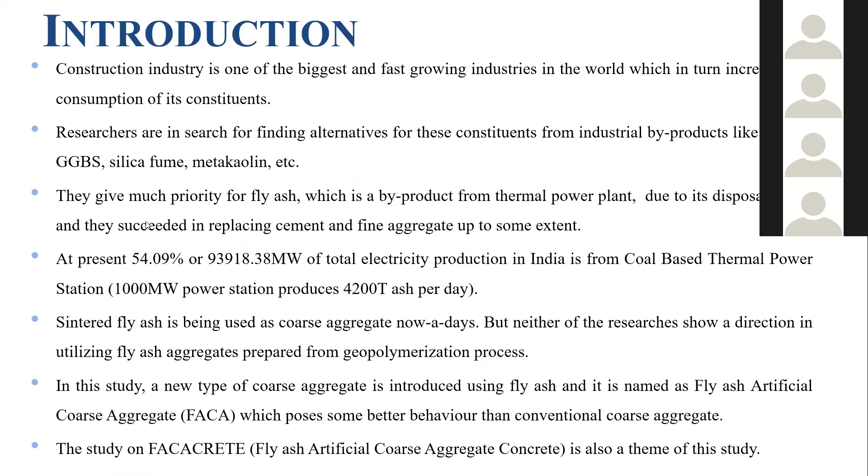The construction industry is one of the biggest and fastest growing industries in the world. In turn, it increases the consumption of its constituents. These are some general aspects in concrete. I'll come directly to the presentation.

Most of the power is generated by coal-based thermal power plants. You burn the coal, and the end product from the thermal power plant is fly ash. The government is currently running a mission, the fly ash mission, an ash utilization mission. So how do we utilize this fly ash effectively? Ten or twenty years back, there was a huge demand and availability of fly ash, and now researchers are studying how to utilize fly ash in concrete and other byproducts.

Still we have some problems. Last week I had a request from the Ministry regarding the Coal Mission and Fly Ash, to contribute to fly ash utilization in an effective manner. They called for that project, the fly ash mission, and we are contributing to it. We need to find how to utilize this fly ash effectively, along with byproducts from this industry like silica fume, GGBS, and other waste materials available around us.

This project will particularly focus on fly ash. The total fly ash production in the world is enough to fill train cars stretching from the north to the south pole. That much amount of fly ash is available at present. That is one prediction.

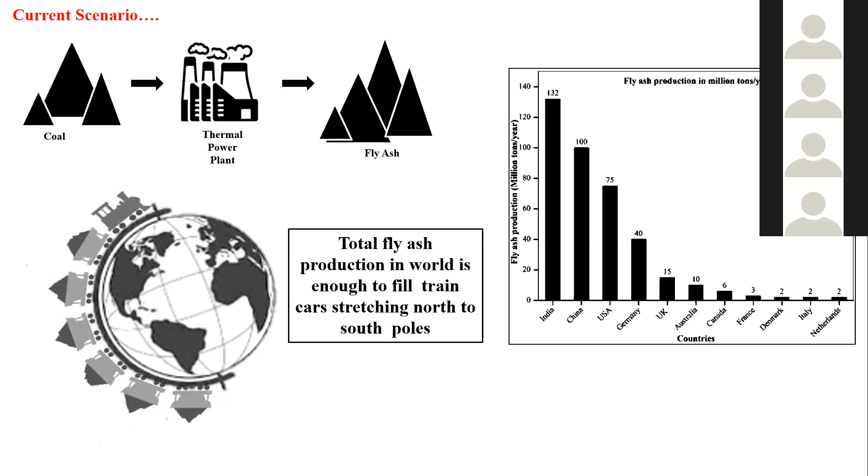These are some of the problems at present. So what we want to do is take the waste materials around us, like silica fume, GGBS, and others, and figure out how to make them useful materials for the construction industry.

I don't want to explain too much about geopolymers, as most people are well aware of that already. Geopolymer is nothing but a source material mixed with an alkaline solution, which together produces a solid matter through a geopolymerization process. This is the technology, and we use it to make artificial aggregate. That's a modified technology, and it is patentable.

Now let me give a brief introduction to geopolymers. What is this technology? Geopolymers are synthetic mineral products that combine properties of polymers, ceramics, and cements, synthesized by polycondensation reactions of geopolymeric precursors. Source materials include kaolinite, clay, fly ash, silica fume, rice husk, red mud, GGBS, and others. The basic property needed for a source material is that it should be rich in alumina and silica.

Alumina and silica - these materials are suitable as source material to make geopolymers. Most materials with silica, like sand, are suitable. It comes down to alumina and silica.

Yeah, these are some introductory parts about that.

Now, how much waste is generated by black fly ash and all those things? For example, this is the typical problem. Two die after dyke of Reliance power plant's fly ash pond breaches in Madhya Pradesh. Most of the fly ash and everything is discharged into the water stream, or stored in that particular open area.

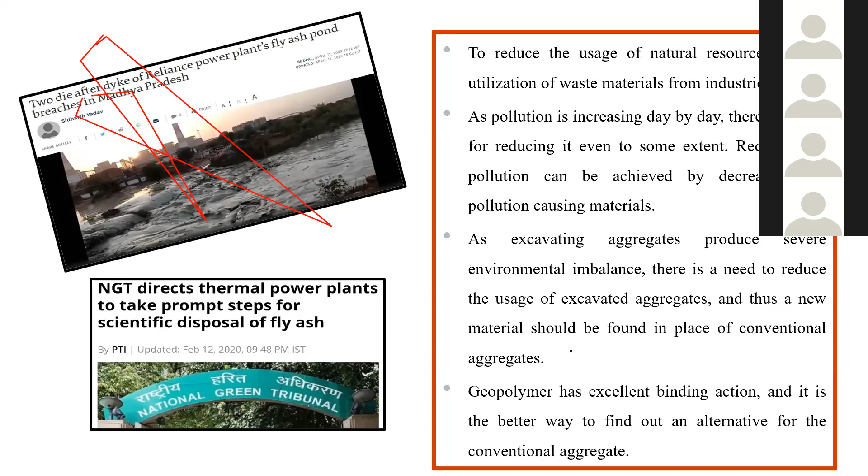Due to water as well as air, it gets transferred from one place to another. There are a lot of issues on one side. The fly ash was obtained from the Mettur Thermal Power Plant near Salem district of Tamil Nadu. It was obtained at the rate of rupees 800 per ton.

The alkaline solution used is NaOH and Na2SiO3. Sodium hydroxide was obtained in pellet form. Different forms are available. Pellet form from the local market at the rate of 40 rupees per kg. The NaOH pellets are converted into NaOH solution of required molarity one day before preparing the alkaline solution. The sodium silicate solution, Na2SiO3, was obtained from the local market at rupees 8 per kg.

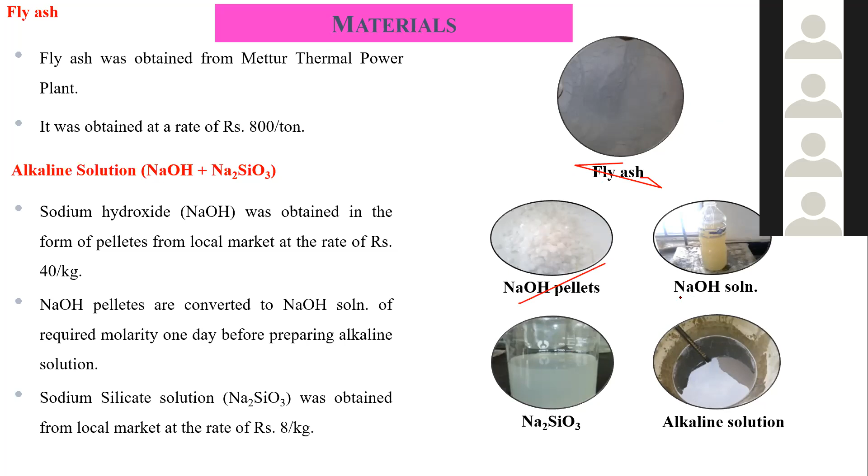These are some byproducts: fly ash, NaOH pellets, and NaOH solution. This is a solution format.

Now, for the FACA, class F fly ash with a specific gravity of 2.26 is taken, then NaOH and Na2SiO3 are taken. Then for the concrete, ordinary Portland cement 53 grade, locally available manufactured sand, crushed blue granite stones, locally available high yield strength reinforcement bar, and potable water are used for this concrete purpose.

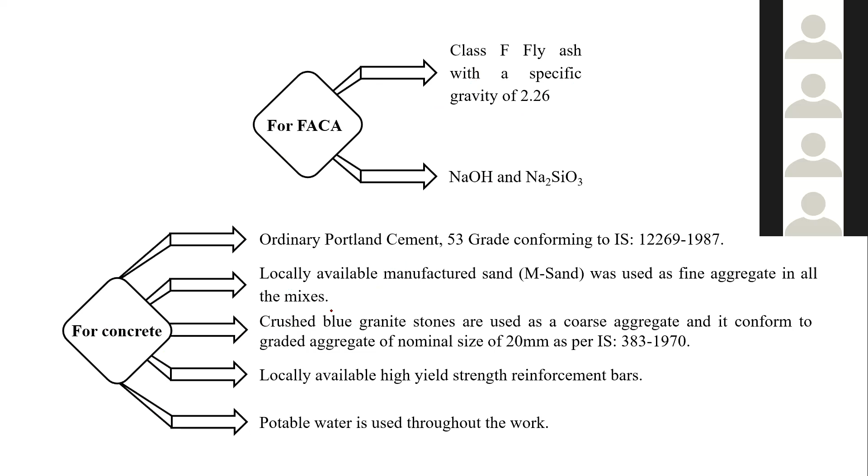Now, what is FACA? That is fly ash artificial coarse aggregate. This is a patent registered material. Myself and Sir Ajmal registered the patent.

What is the year? Application number... 2018. Yeah, 2018. That is fly ash artificial coarse aggregate, called FACA.

So you have this document open, you can get the technology behind that, right?

Then preparation is very easy. You take the sodium hydroxide solution to sodium silicate solution by mass ratio fixed at 0.5 for all the mixes. We tried different molarities from 8 to 16 molarities - 8, 10, 12, 14, 16 molarities of sodium hydroxide, NaOH solution was used.

The ratio of activator, that is solution, to fly ash by mass is varied from 0.3, 0.35, 0.4. It varies with respect to researchers, according to your convenience, according to your laboratory, according to your purpose. You can change the molarity, the ratios, everything.

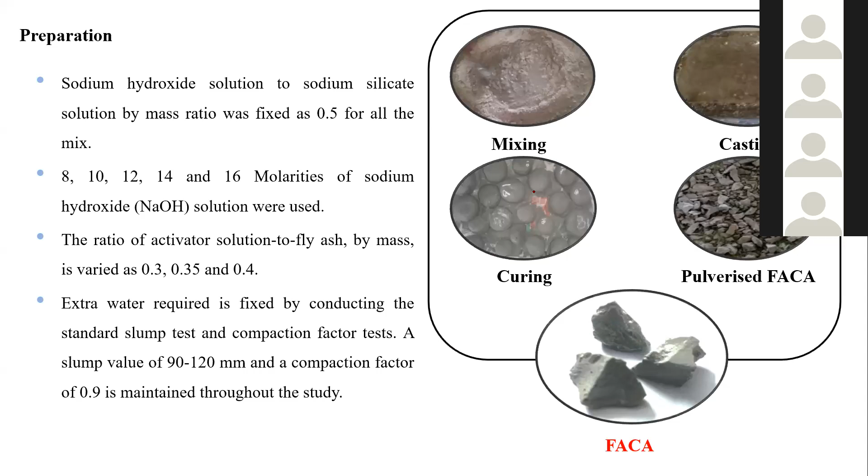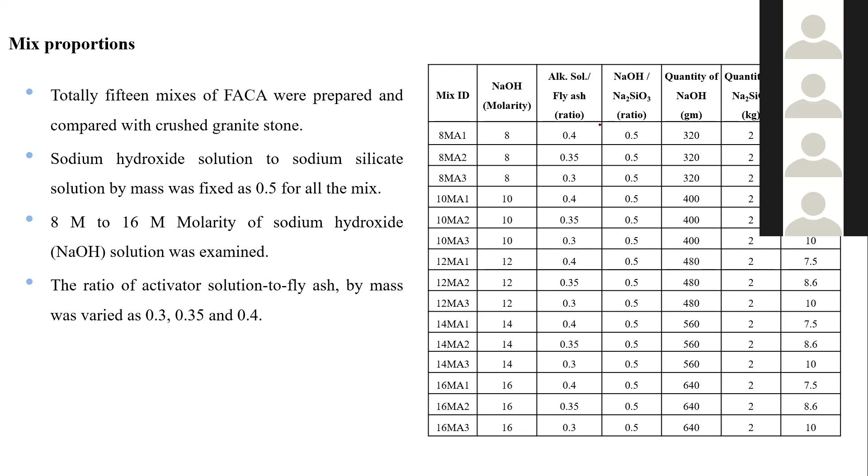This is one of the research only, it's not used in that industrial plant scale, right? So these are some matrix given by the trial mix to check the property of aggregate, that is the mix ID, the NaOH molarity, different molarity from 8 to 16 molarity. The alkaline solution to fly ash ratio we maintain from 0.3 to 0.4, that is 0.3, 0.35, 0.4, different mixes. Then the alkaline solution ratio, NaOH to Na2SiO3 ratio, then quantity of NaOH and quantity of Na2SiO3, and the quantity of fly ash shown in the figure.

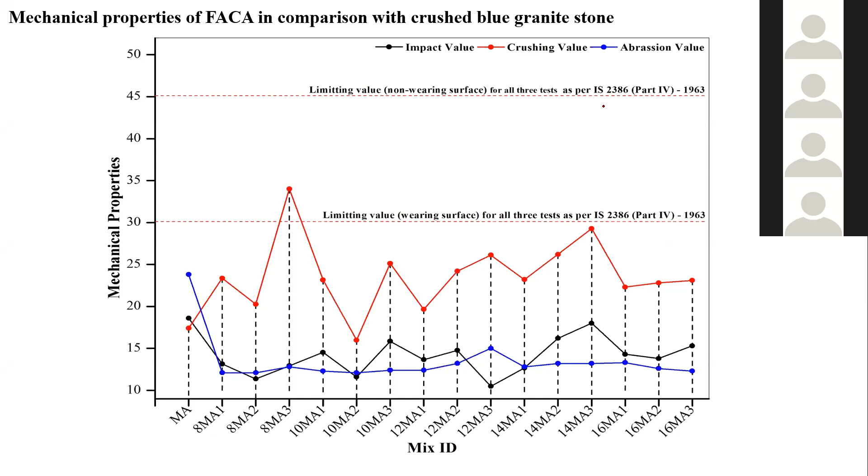So any aggregate that comes to the market, people ask if it may satisfy this code limit or not. So the limiting value for wearing surfaces as per code IS 2386 part 4, 1963, for any aggregate we use for wearing surfaces, that is the limit, right? Then the limiting value for non-wearing courses is as per IS 2386 part 4, 1963. These are the graphs showing the mechanical properties like impact value, crushing value and abrasion value, as shown in the figure here. So most probably this aggregate is satisfying these mechanical properties, all those things, right?

One more thing, if any material comes to the market, people ask what about the chemical composition inside this aggregate. We did SEM and XRD, XRF also. From this XRF, we obtain the result, the oxide percentage, how much oxide, Na2O and SiO2 and SO3, K2O and Fe2O3 oxide compounds we can calculate from XRF. The element percentages we can calculate, atomic number and masses and all those things, more or less equal to that of conventional aggregate. That is what we can obtain from the study.

What is the critical observation that was made? The X-ray fluorescence patterns of FACA, the EDAX spectrum and scanning electron microscope were done for FACA. This examination shows that FACA has a crystalline structure. Crystalline structure is very good for that bonding.

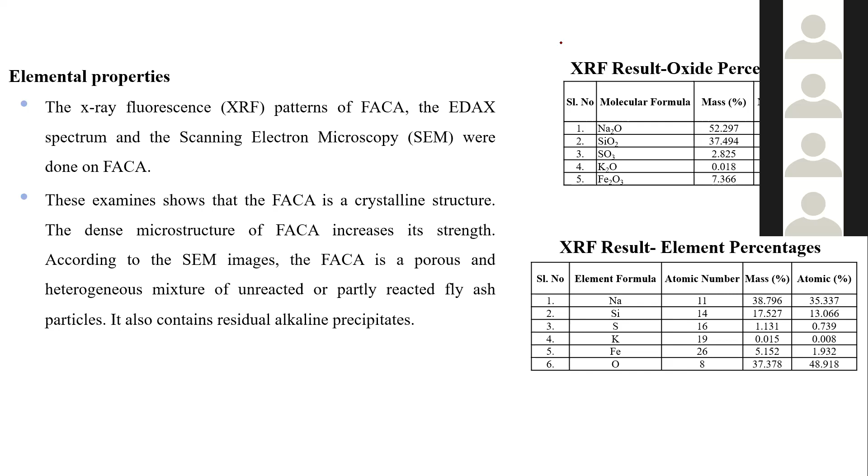That is very useful - crystalline structure we already studied in the geology part. The dense microstructures of FACA increase the strength according to SEM images. The FACA is a porous and heterogeneous mixture of unreacted and partially reacted fly ash particles. It also contains residual alkaline precipitations. These are the things we observed from the SEM as well as XRD and XRF patterns.

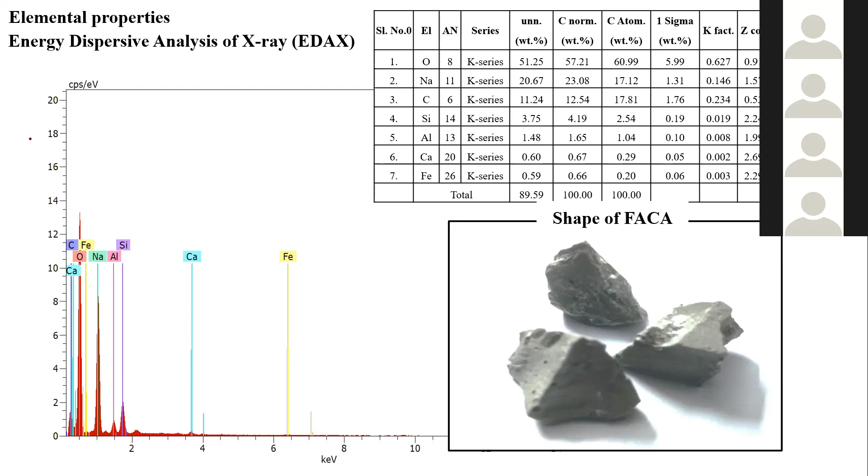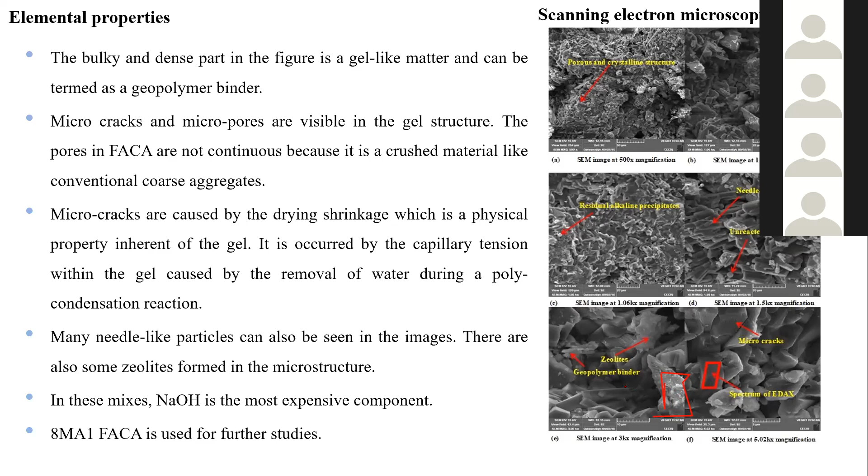What we learned from SEM is we can find the surface morphology of that particular material. The EDAX means you can get what oxide compounds are available in that particular area. That is a major advantage.

Then FA-crete - this is nothing but most of our patents, like microbial-crete, FA-crete, loofah-crete, aloe vera-crete, glass-crete, basalt-crete. These are our patents, my students and myself, we did these patents. Just type in Google, we can get crete, FA-crete, microcrete, basaltcrete, glasscrete, claycrete, lufacrete, and so on - 14 patents, all called crete.

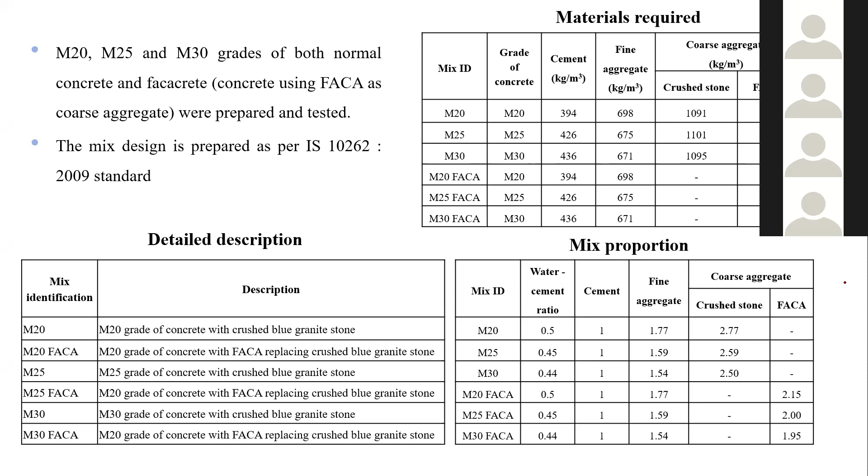Here Ajmal also did these aggregates put in the concrete. What will happen? That is called FACA-crete. So he did different mix IDs, M20, M25, M30. The M20 with FACA aggregate, M25 with Ajmal's FA aggregate, M30 aggregate. These are the materials required for the grade of concrete - cement, fine aggregates, coarse aggregate, water, and so on. These are the mix proportions, water cement ratio, cement, and all those things. So when these aggregates are put in the concrete, what happens - that is the FACA-crete. These are some fresh properties.

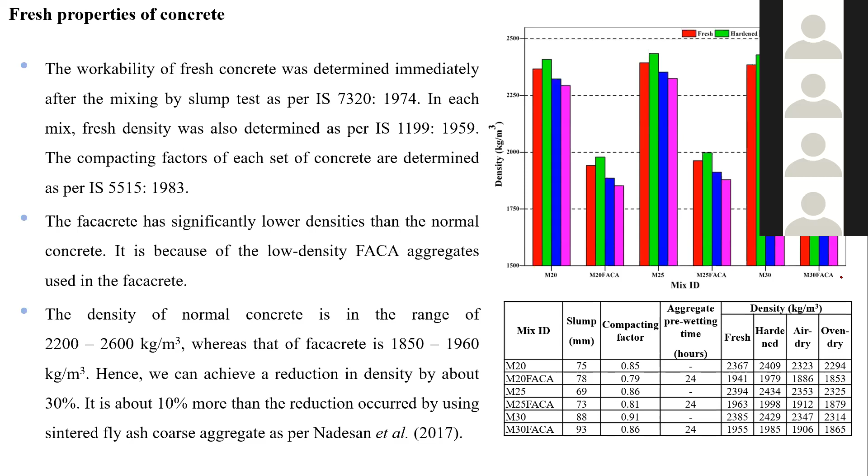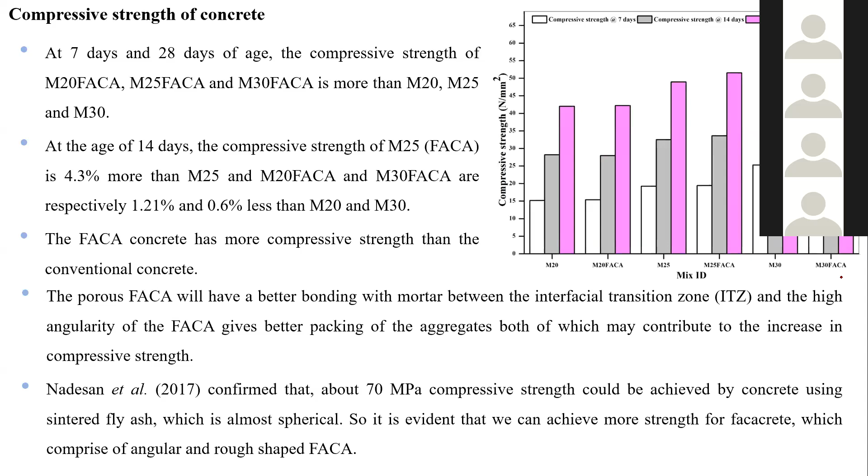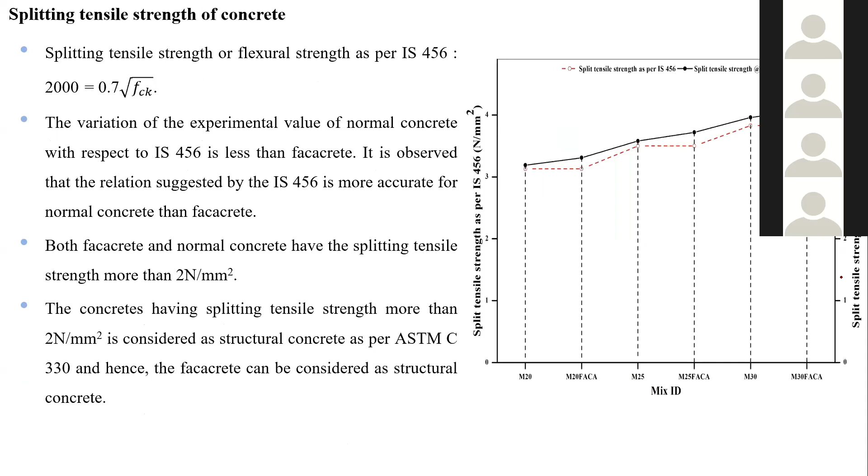Then split tensile strength - it is very useful for pre-stress concrete applications. The more split tensile strength, the more useful for pre-stress concrete applications. We achieved that also. Then flexural strength - it is nowhere used in designing mixed concrete, but we wanted to check what is the flexural strength also.

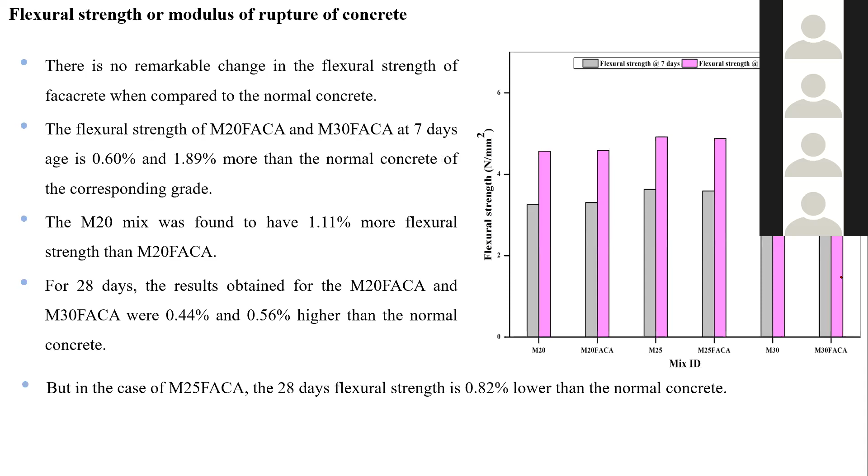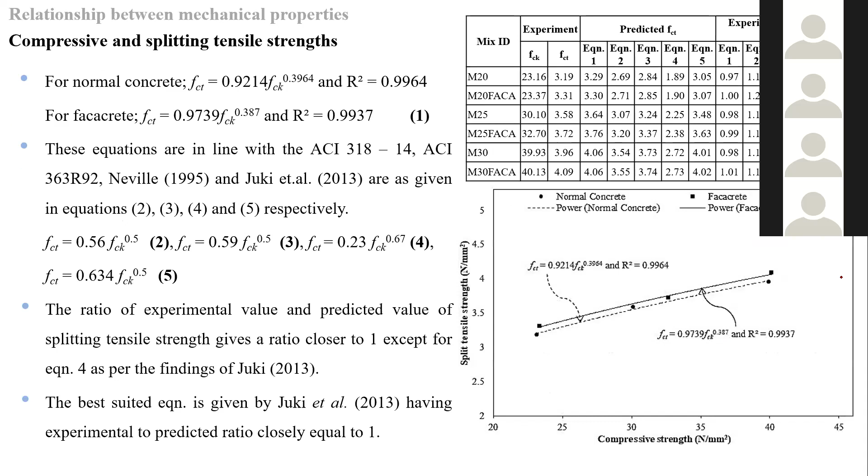So this is a numerical relationship developed between the mechanical properties and splitting tensile strength - this is compressive strength and splitting tensile strength. These are mathematical models only, no need to concentrate more on this particular area.

So up to this, one part is so simple. The technology is very simple - you take the fly ash, that particular quantity, and prepare the alkaline solution. Then mixing together, we can get that into solid mass. That solid mass may be cured - ambient curing, hot curing, or oven curing according to your convenience. After that, you pulverize by means of a crusher, or it may be broken by means of a hammer. That is one process.

Another one is the wet process. It means you mix fly ash, then alkaline solution, put it in the pan mixer - that's one method. One more method available is the rotary mixer. With pan mixers, we can adjust the speed and the angle and spray the solution or dry the mixture. We can get the aggregate.

This is the concept, then you do this test. So whatever tests you do for normal conventional aggregate, the same kind of things we can do for this kind of aggregate also. Then finally you get the aggregate. This aggregate may be put in the concrete - what will happen? That is called FACA-crete.

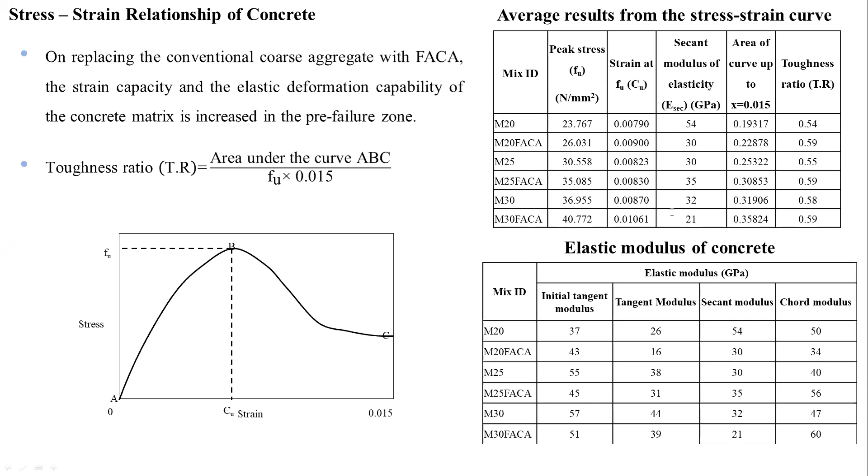Now I am explaining the stress strain relationship of concrete. From our experimental investigation, we found that the stress strain behavior is very impressive with this FACA aggregate. On replacing the conventional coarse aggregate with FACA aggregate, the strain value, strain capacity and elastic deformation capability increase. The toughness ratio also increases. The toughness ratio is the area under the stress strain curve divided by fu into 0.015, as per IS code.

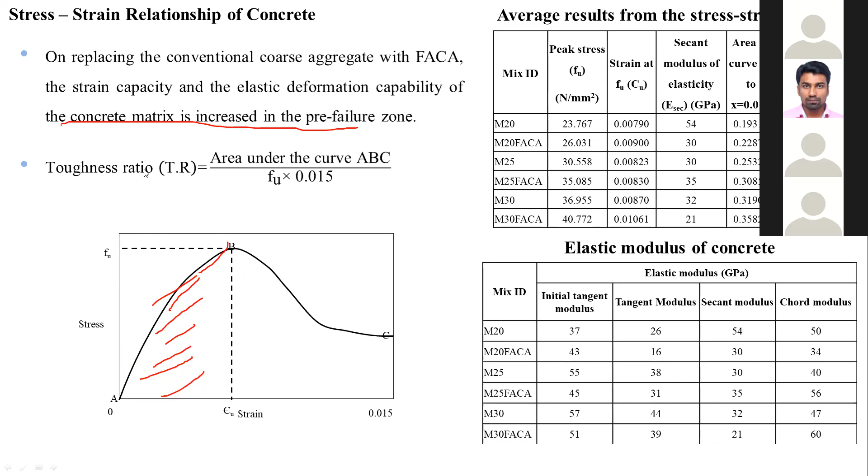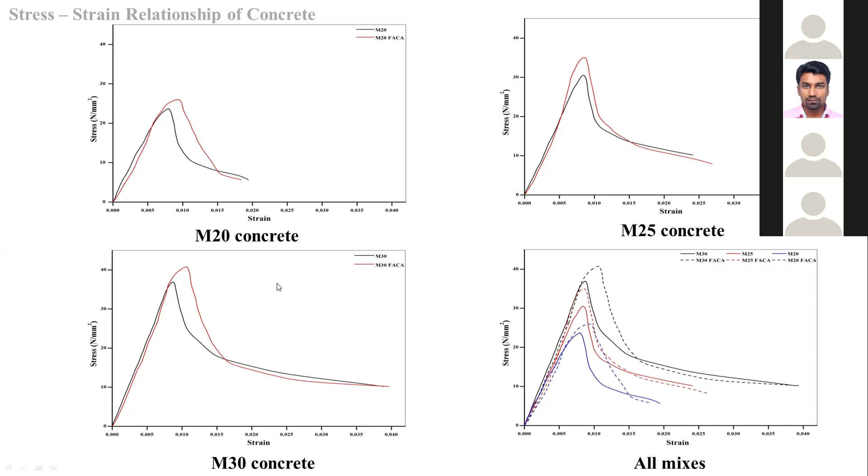From this graph, the red line represents M20 facacrete, and the black curve is conventional coarse aggregate concrete. Up to the pre-failure zone, the toughness ratio increases, and the strain behavior also increases. As explained before, we find a significant increase in toughness ratio when FACA is used.

Also, the post-peak segment of the stress strain curve is affected by introducing Faca into the concrete. By examining the crack pattern, for lower grades of concrete like M20, we see the failure is by localized cracks - a single crack localized failure. On increasing the grade of concrete, the number of cracks increases, and the failure even converts into shear failure.

By examining the facacrete members, we found that even at lower grade concrete, there are multiple crackings in the failure mode. This is a change, an advancement from normal concrete to facacrete.

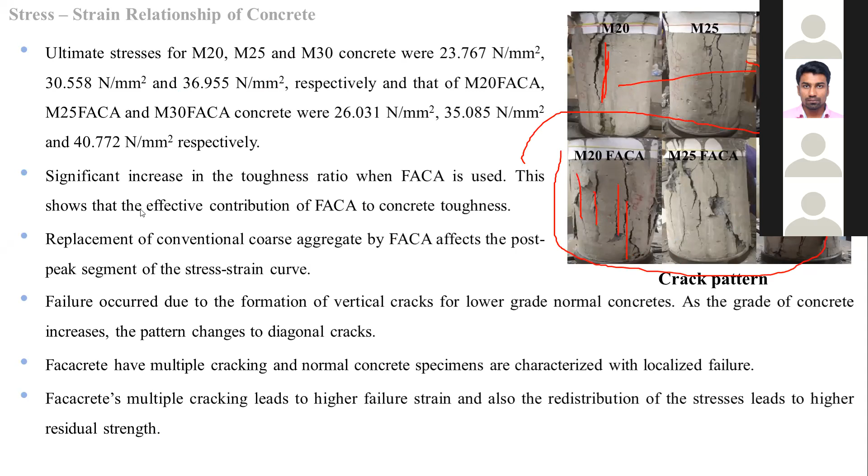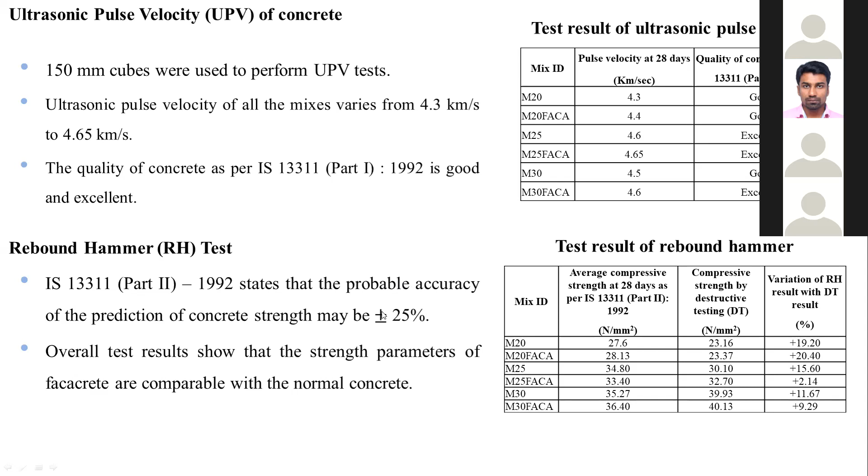Next we studied the slip behavior of Facacrete. This is a new test that most people have not tried, but it's an important test to determine how the material used in the concrete behaves. First, let me explain the test.

I used 100 mm cubes for this test, with a spiral confinement reinforcement inside the cube. This specific reinforcement is introduced in the concrete at the time of casting, with a small projection where we connect our dial gauge. When we pull the reinforcement, the specimen remains stationary, and the reinforcement drags out of the concrete matrix, allowing us to take readings from the dial gauge. This is the basic concept of the slip behavior test, and we can also find the bond strength using the general equation: load divided by area.

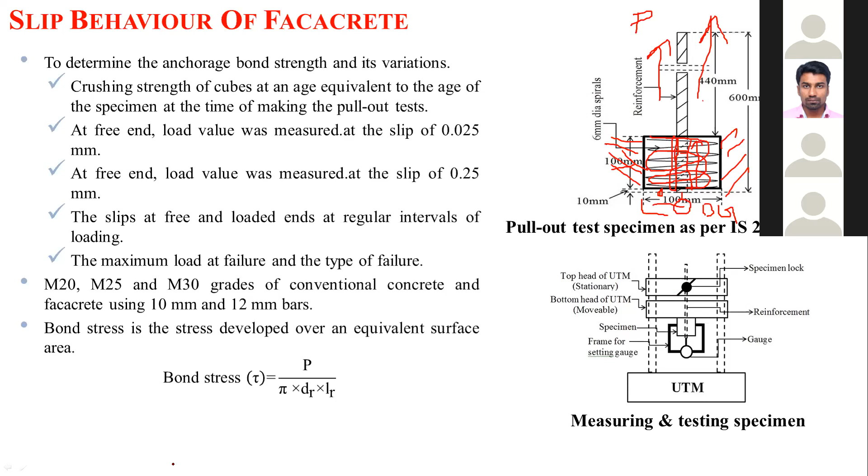So we used this test in UTM. In the modes of failure, we found that for 10 mm reinforcement, rod failure occurred, because if you pull out the reinforcement, the rod failed first. That is because of the bond. If we apply load here, the reinforcement fails first, because the bond strength is more than the tensile strength of the reinforcement.

But if we use 12 mm reinforcement, we find that the reinforcement will easily come out of the concrete specimen, and that failure occurs because of shear, and also bond failure occurs. We can find that there will be a cone of concrete found in the specimen, a cone-like concrete substance, which we find due to the bond forces acting on the concrete in front of the rebar.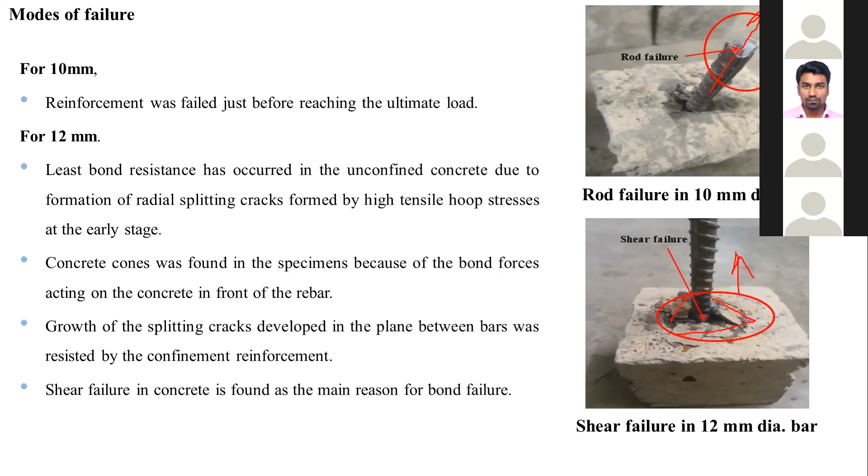Next, we find the bond strength. From the slip behavior, we found that the ultimate bond stress of facacrete is much more than conventional concrete. The increase in compressive strength represents an increase in the bond strength between the aggregate and the interfacial transition zone. That is, if we use facacrete, the aggregates will have more bonding than conventional coarse aggregate.

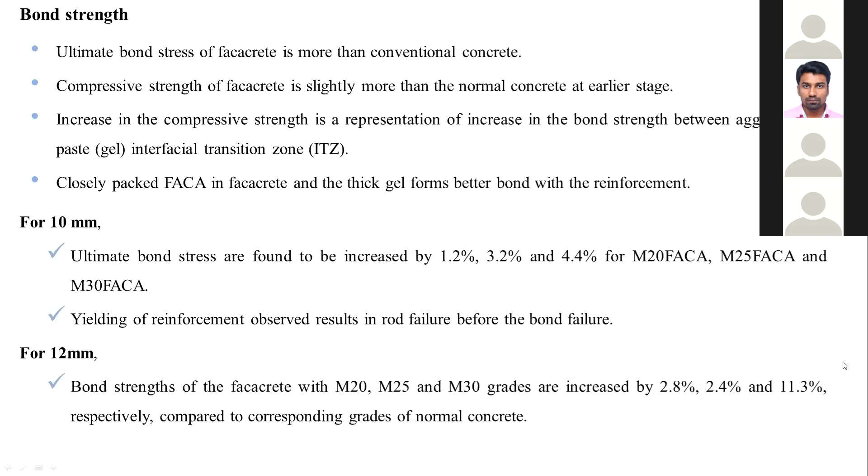For 10 mm concrete, we found that the yielding of reinforcement, as I explained before, resulted in rod failure before the bond failure. And also for 12 mm reinforcement, we found a bond failure due to shear force, shear failure. So in general, our graph curve can be generalized into three phases.

That is, there is one initial phase which is a linear curve, then a small gradual increase, then the failure curve. These three phases were also observed by Bhaskar, who gave this research in 2010, and also found that maximum bond stress occurs between 0.3 and 1.5 mm slip. This maximum bond stress validates with my research also.

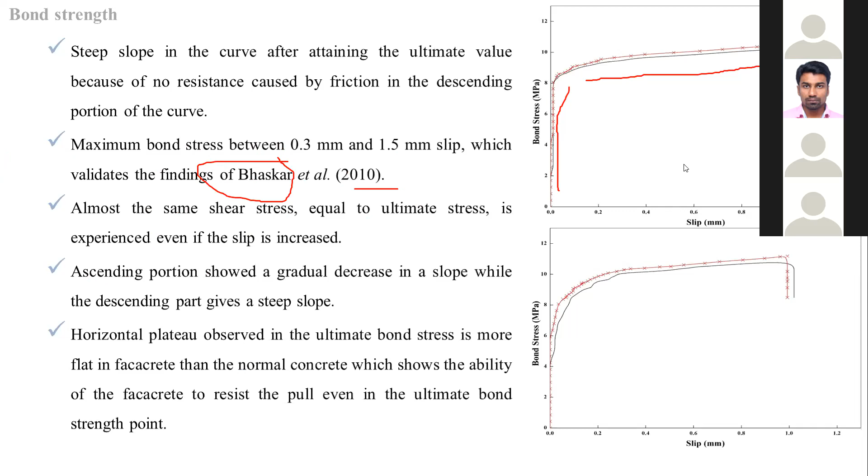We can find that same shear stress equal to ultimate stress is experienced even if the slip is increased. This is our three stages of graphs which I explained before. That means firstly, up to 70 to 80%, there is a linear relationship between load and slip. Secondly, there is a gradually increasing load slope. The third phase is the failure phase, that is rapid decrement in the bond stress.

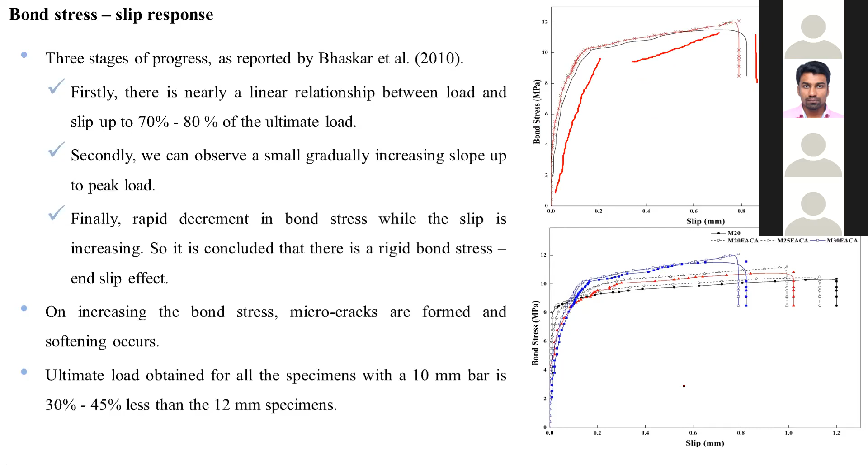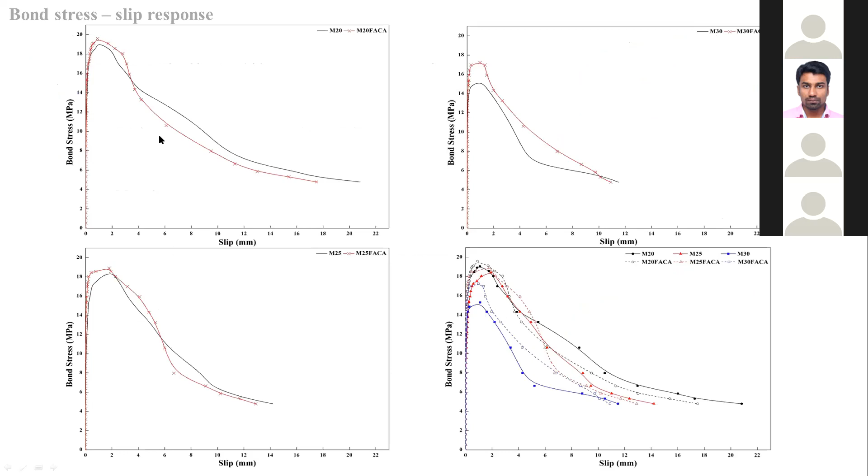Now these are the curves which I found, and I also found empirical modeling of the bond stress versus slip curve, examined by Eligehausen, Soroushian in '89 and '91, who found the empirical equation, and Bhaskar et al. validated that this experiment comes in line with the above authors' experiment research outcomes, and also my research comes in line with Bhaskar et al. 2010. This is the generalized equation for the empirical modeling.

Also, if we want to check whether this equation is right or not, we have to check it with other codes which I've taken here: CEB-FIP, that is a French code, BS Bureau of British Standards, ACI American Concrete Institute, and EN European Standards. These four codes are used in order to validate my research, and I've taken them following Mo et al., who also used these four codes to validate his research.

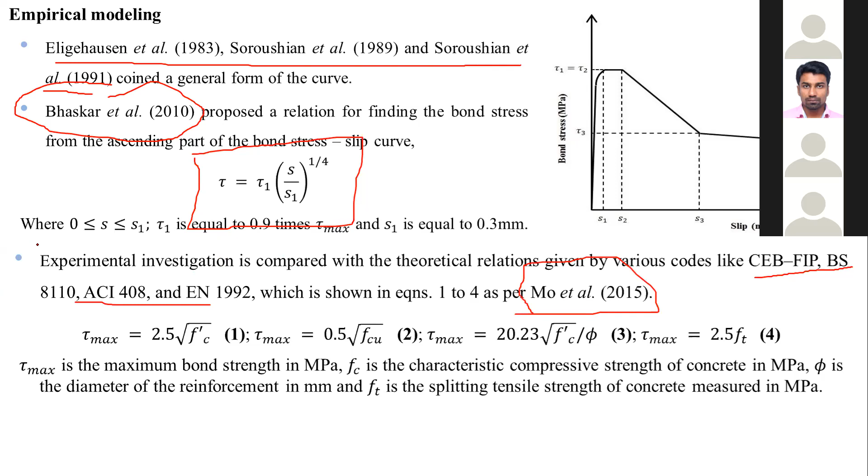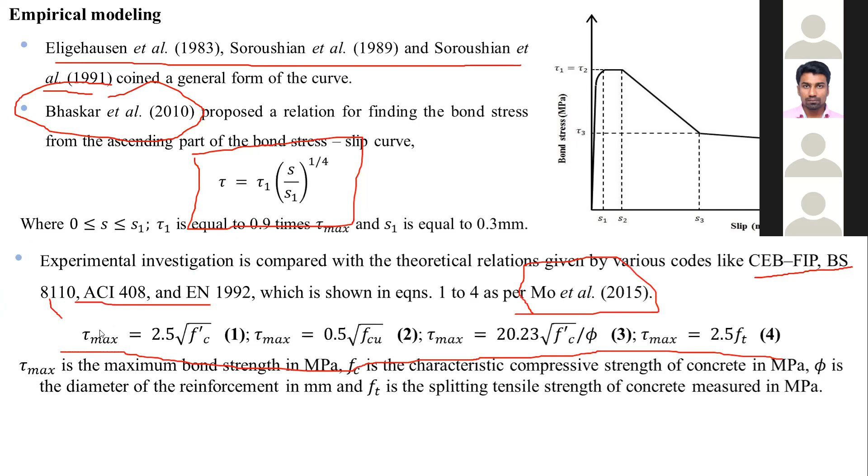So these are the equations shown as per each respective code. From the empirical equation, we can find tau max from the experiment, and also using the equation, we find tau max for each respective code.

From this observation, the best relationship for my experimental investigation is CEB-FIP, that is the first code, a French code actually. It is a federal code of France, and my experiment comes in line with CEB-FIP, and also this.

These two codes, ACI and EN, show slight variations, but the European code and American Concrete Institute code also come in line with my research outcome. But CEB-FIP is more accurate, as I explained before. The CEB-FIP code is more accurate with my research. Now, the behavior of facacrete.

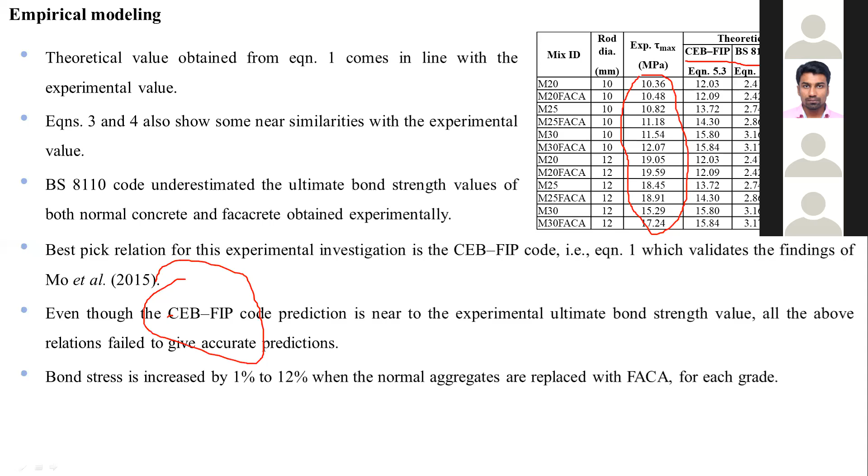We introduced many structural behaviors by using cube, cylinder, and everything. But we have to find how it behaves when we apply this to a structure.

So I used 1.7 meters of RC beam with a clear span of 1.5 meter, and it was experimented with load, detailing is given here, and also I used the DEMEC, that is demountable mechanical strain gauge, for determining the strain values.

That is, I will explain here. The DEMEC is placed in order to determine the strain value. There is a pellet attached to the structures, whatever it is, the beam or frame, anything - we should attach pellets.

Then after when loading is going on, we are taking strain values using them at each point. We have to attach as many pellets according to how many strain values we need. So here I took 4 strain values, that is 2 in the compression zone and 2 in the tensile zone.

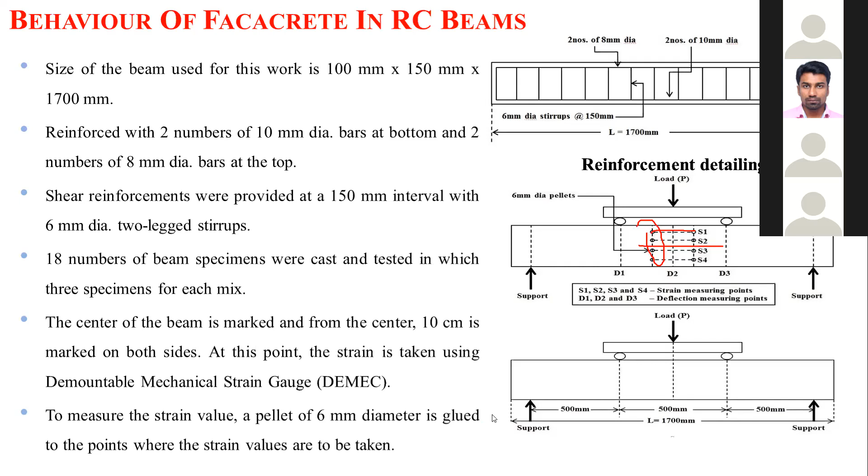So these are the preliminary things which we have to say about our test. And now from this test, ultimate load is found. We can find that for facacrete, ultimate load is decreased.

But it is actually a negative part of my research. I can't say it is a negative, but it is a flaw because we can't reduce our strength.

But on increasing the grade of concrete, we found that our facacrete ultimate load is also increased. That is, the difference between the ultimate loads of conventional concrete and facacrete is

tremendously decreased. We can find it out from this curve, from this graph. So I found that this facacrete is very much effective to replace a natural coarse aggregate for higher grades of concrete.

So, and also we found that along with the lesser ultimate load, the initial crack load was far lesser than normal concrete. And also for higher grades, we found that initial crack was delayed.

It is actually a negative for a structure, because if the initial crack is delayed, and also the ultimate load is decreased, we will get minimum time to escape if this concrete comes into public use. Because if we find a crack, we get some time up to failure only.

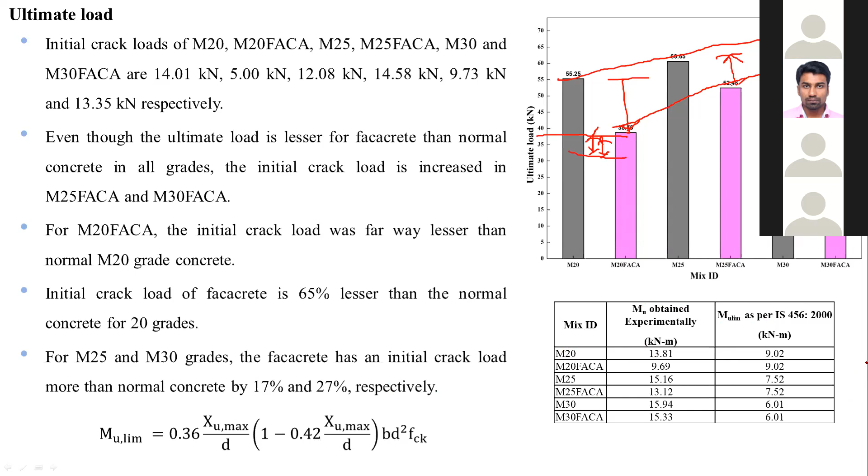It is a pure new material without any admixtures or strength improving factors. We didn't add anything. So next we calculated the load deflection behavior, and we found that all the cracks occurred in the pure bending zone only.

So the facacrete beam showed linear behavior up to the failure part, and the deflection behavior was linear for facacrete up to failure.

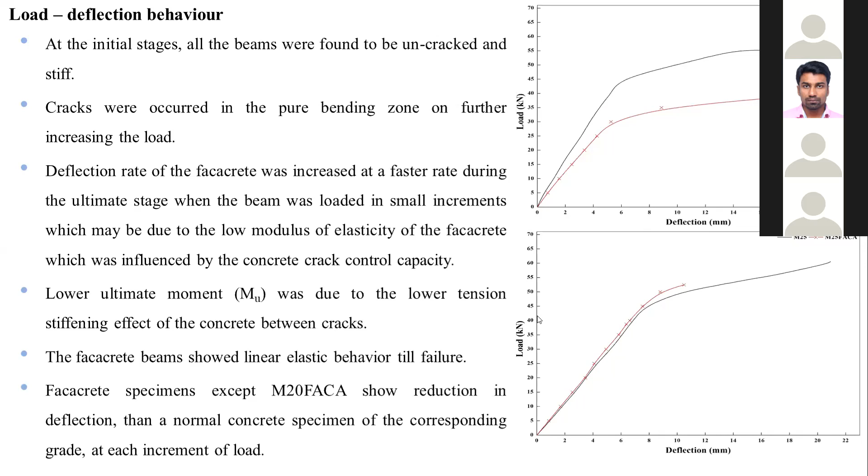And these are the regression analysis equations which were done on this experiment for each curve. Almost all the curves get a unique equation, the regression analysis equation. And these are the values which we obtained from the regression analysis.

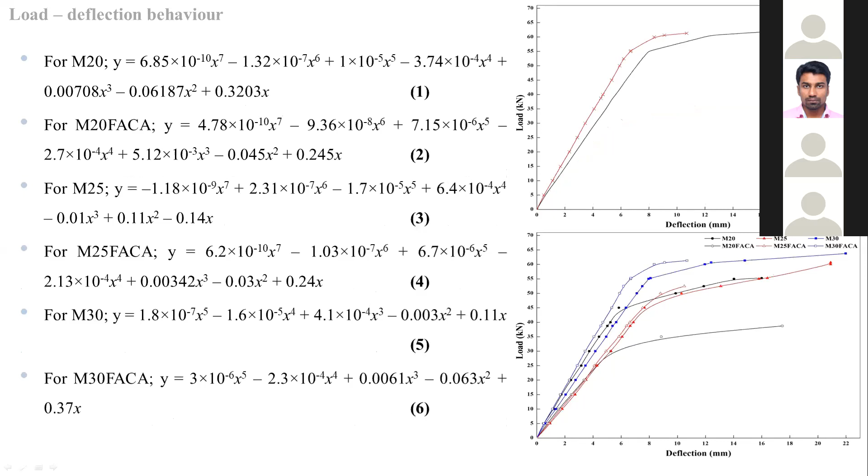And we found that even though facacrete compressive strength is increased, its tensile strength is decreased. Facacrete is advanced more than conventional concrete in compressive strength, but it deficits in the tensile part.

So it is actually not a false research. It is the beginning of a research, because we get a good result. We got a good result in compressive strength, but the tensile part is very...

It is a little bit backward, so we have to improve that part. It will come in our future research also.

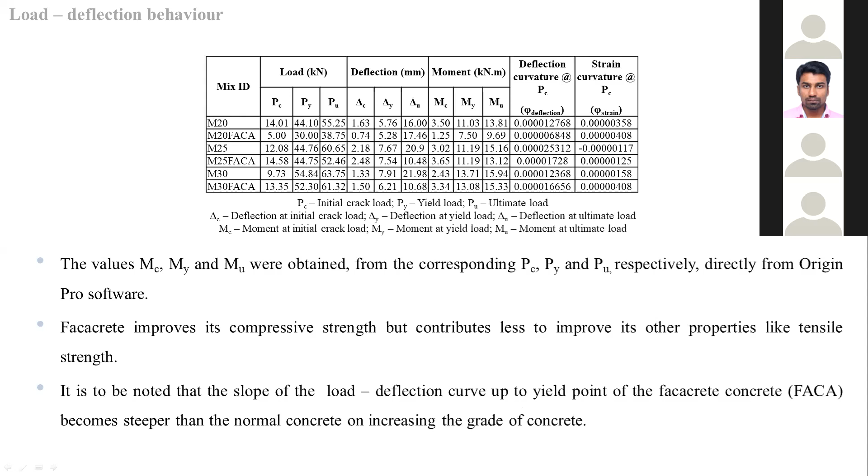And it is to be noted that the slope of the load deflection curve up to the yield point of the facacrete concrete becomes steep. That means for facacrete, we can see that there is a steep slope. Now we found ductility, and we found that on increasing the grade of concrete,

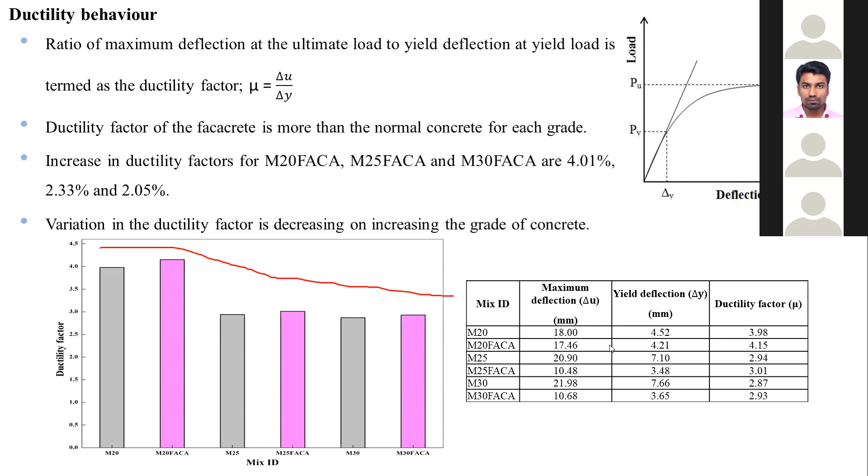the ductility was decreased. It is clearly observable from this graph. And finally, we found the deflection profile, on which we found that facacrete deflects less for a particular load than normal concrete.

That is, it clearly says that facacrete is more brittle than normal concrete for a particular load, particular grade, and at a particular load of time.

And that is what I explained before - there is one flaw, that is this increased initial cracking time. So it should be corrected, and it can be corrected by using admixtures. We will try that in our future research also.

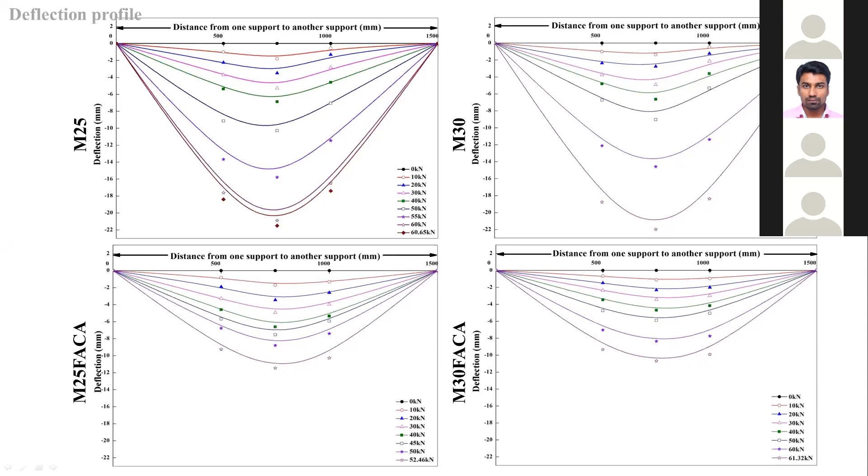Now, I already told that I took four strain values, that is 2 in the compressive zone and 2 in the tensile zone. That is expressed in strain 1, strain 2, strain 3, strain 4. NC means normal concrete and FACA means facacrete. That is explained here in the graph.

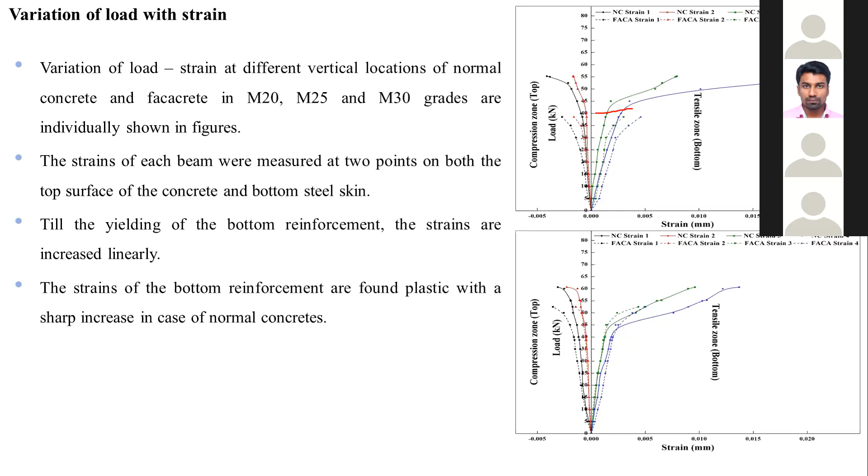We found that the strains of each beam were measured, and also found the yielding of both reinforcements. Up to the yielding point, the strain increases linearly, and the strain of the bottom reinforcement becomes plastic with a sharp increase in case of normal concrete. Also, for M25 as well as M30 grades of concrete, the yield point occurs almost at the same load as normal concrete. We can find this for M20 and M25.

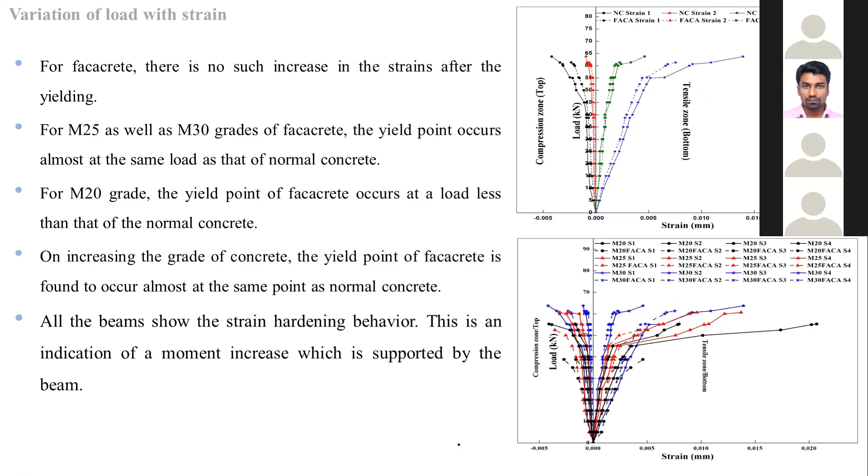Now we found the variations with curvature. Curvature is taken for deflection, and both are expressed in the curve. The variation is similar to that of the load deflection curve, which is actually normal for any structure's moment-curvature diagram.

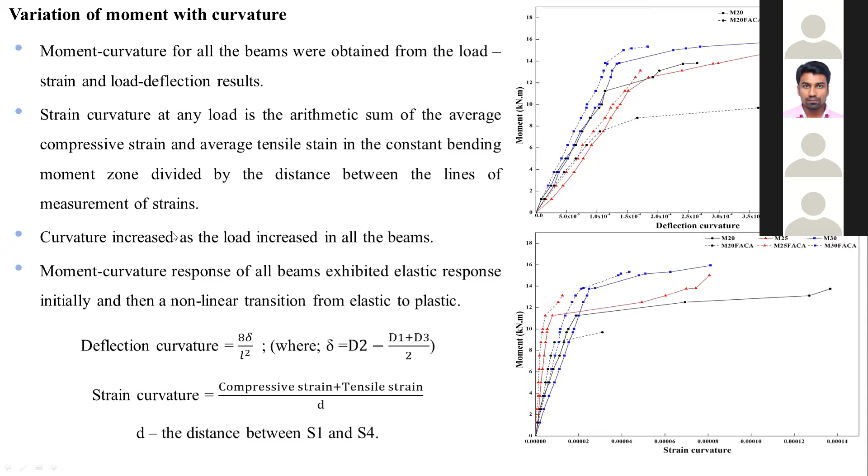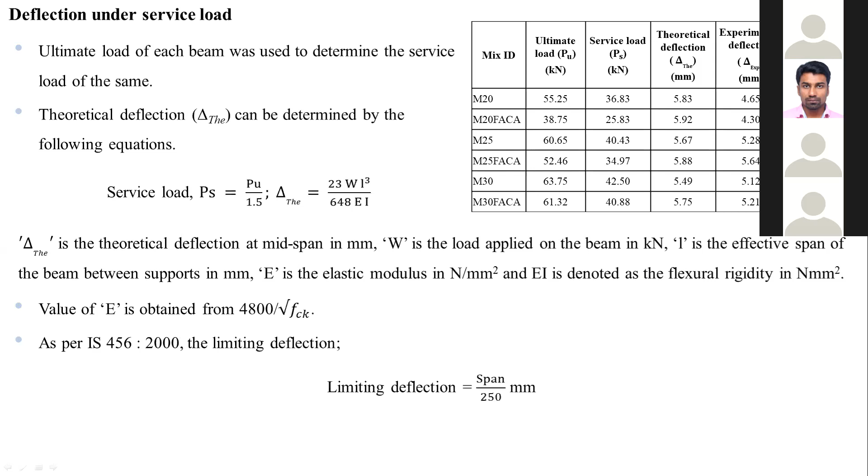We've also found deflection under service load, and it is essential to find out how the structure deflects under the service load. We found that the stiffness is increasing on increasing the grades of concrete. For M25 and M30 grades, the stiffness of facacrete is 3.2 and 17% respectively more than normal concrete. That validates our result that facacrete is more stiffer and brittle.

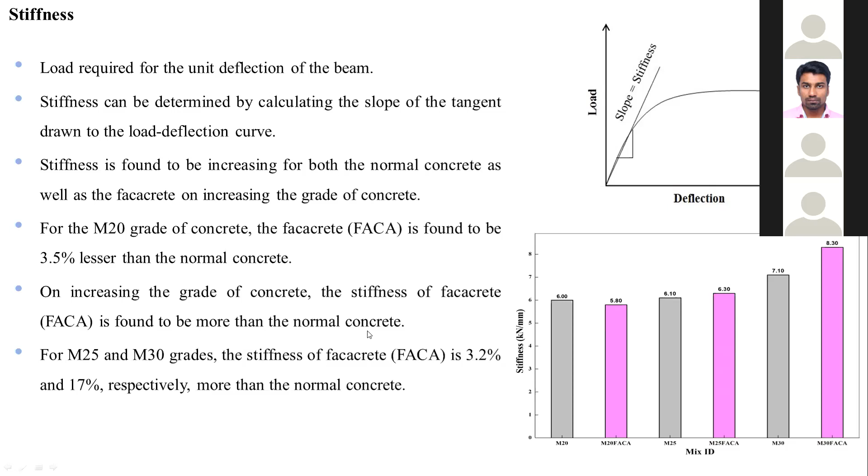Now this is the energy absorption result obtained from our experiment. For normal concrete, it is found that on increasing the grade of concrete, the energy absorption capacity increases, but for facacrete it decreases. This is because of the brittle nature of the concrete.

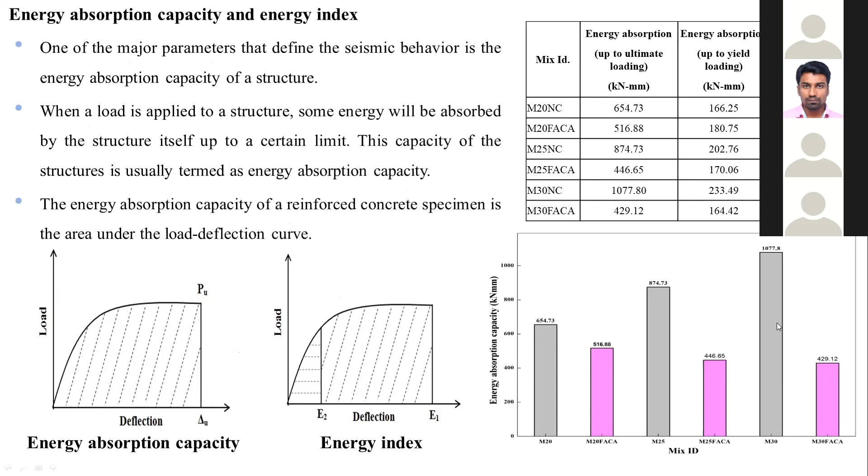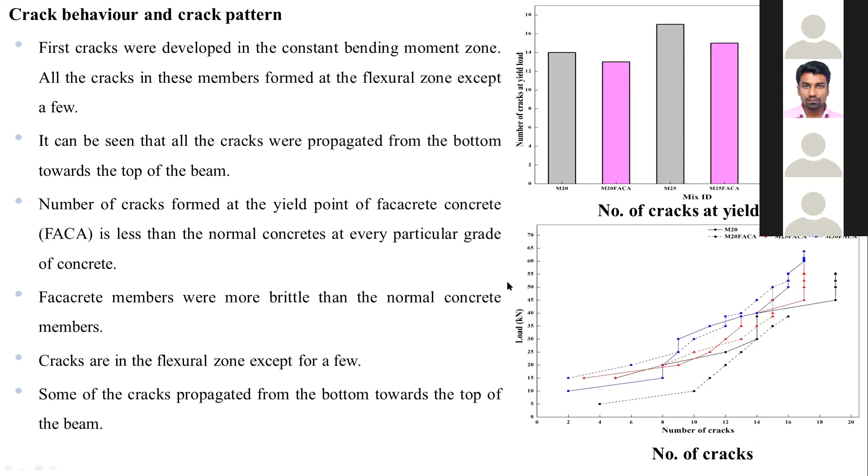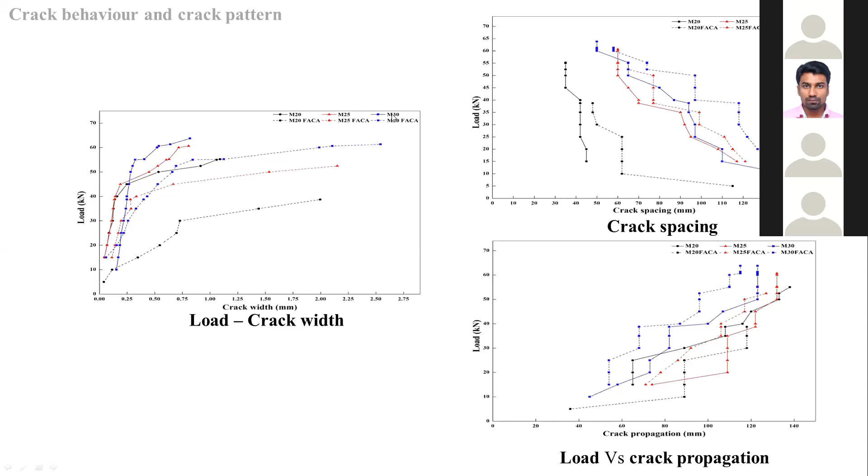We also found the crack variations: load versus crack width, load versus crack spacing, and load versus crack propagation. These are the failure patterns obtained for our specimens.

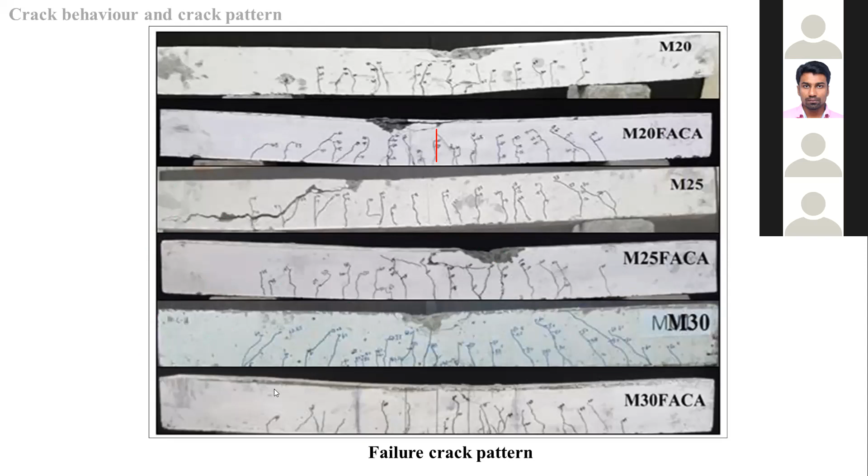It should be noted that for normal concrete the cracks were minimum, and for Facacrete the cracks increased. Most of the cracks obtained were in the flexural zone only, extending from bottom to top, some extending up to the top, which should be carefully observed. A few of the cracks are outside the flexural zone. The experiment had a good outcome, and we can conclude the entire lecture with these two slides.

My guide explained about the FACA material, and the main advantage is that the density of the material is 1100, which comes within the limit of lightweight aggregate. So we are producing a lightweight aggregate, and we were actually surprised to see how much we can save on dead load.

FACA aggregates are suitable for concrete that is subjected to freezing and thawing. We also found many acidic and durability tests, and it all passed for FACA aggregates. We found that the impact value is lesser for FACA.

My guide explained whatever tests we had done for the aggregate. For Facacrete also, as per IS code, we had done all the tests, and all the tests validate that Facacrete can be used for wearing surface as well as non-wearing surface.

It is important to say that we particularly use an 8 molar mix because the usage of sodium hydroxide is less, as it is the most expensive item among the mixing materials. If we use an 8 molar mix, we can use less amount of sodium, so that we can reduce the production cost of the FACA aggregate.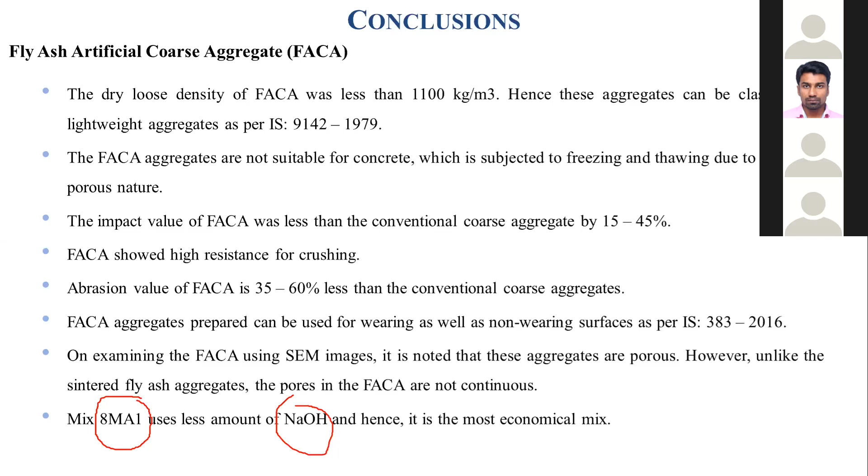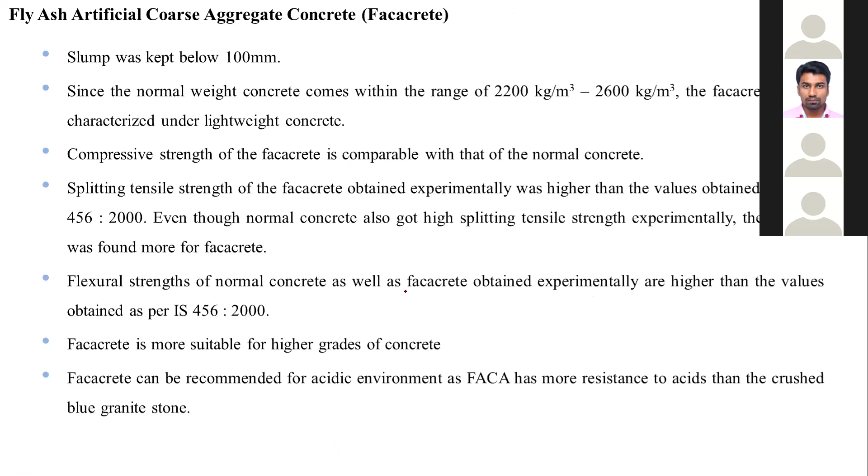But that behavior which we found can be improved by adding some admixtures or some improving factors, and we will include that in our future work also.

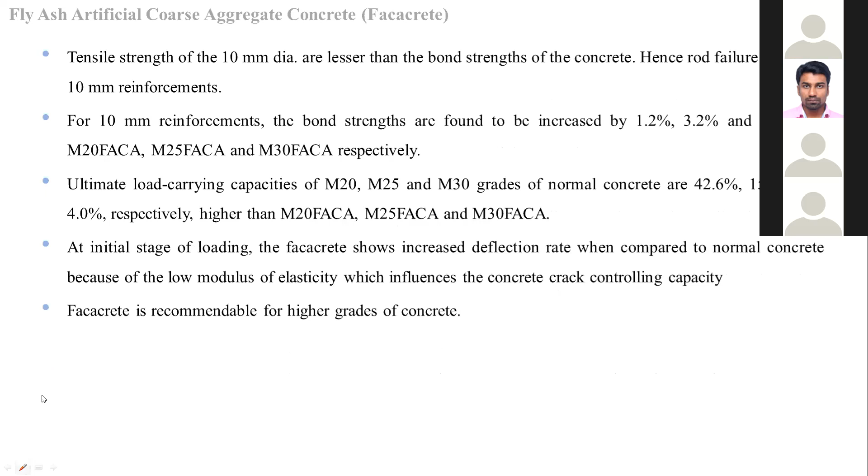And also, I already told that facacretes are recommendable for higher grades of concrete, as we have seen in the reinforced structural behavior of the concrete.

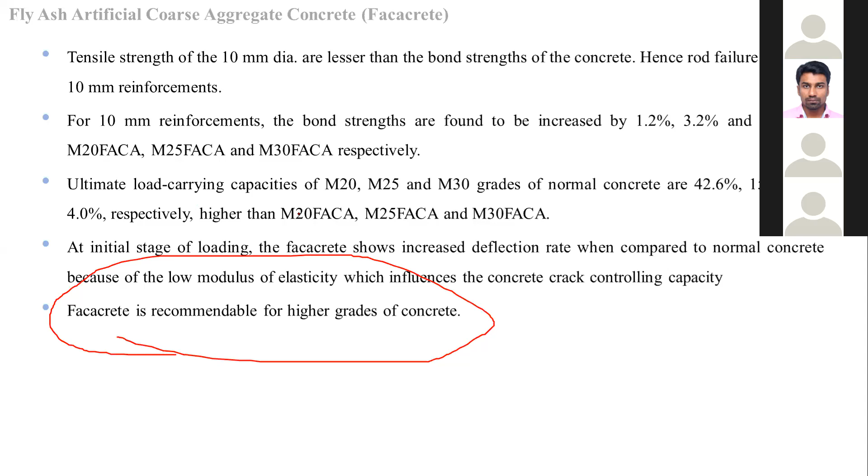Now, my future work, I had planned to carry on my research on this topic, because it is very environmentally effective. We can reduce environmental degradation by using this type of aggregates, green aggregates, and also green synthesis of construction materials should be improved and researched.

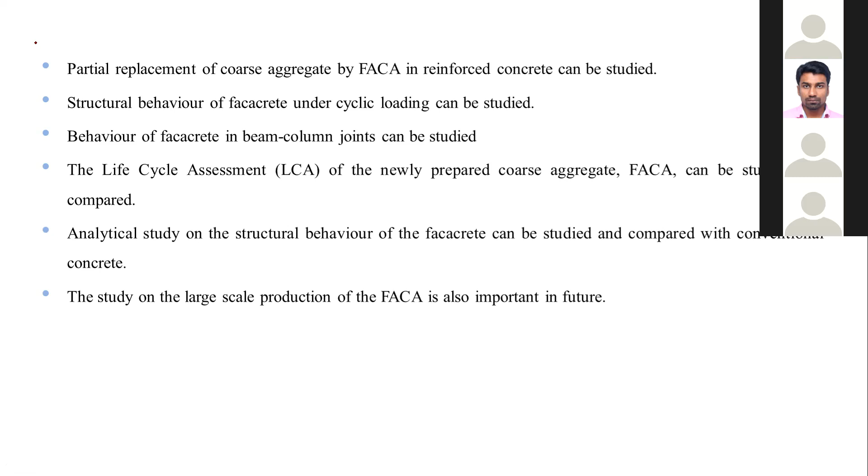So I am trying to take this research forward to these six lines. In this, two parts are already completed: partial replacement of coarse aggregate by FACA, and also structural behavior under cyclic loading was also completed.

Next, I am planning to put this FACA in the beam column in order to determine the behavior, and also life cycle assessment is important on this type of newly introduced material in order to find out how it will behave in the long run.

So analytical studies were also part of my future idea. And then the most important part is to find out a production unit, a production mechanism for this FACA, and it is in the final stage. We already planned the plans and all, so it will occur in the near future also.

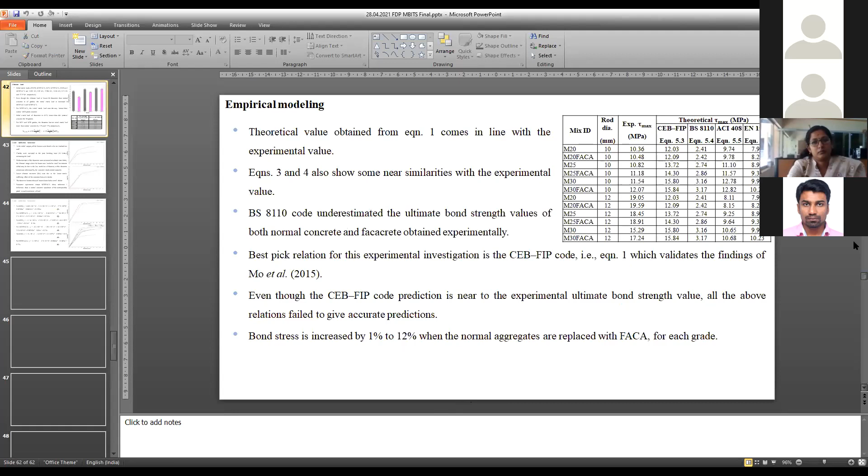Okay sir, how to compare the molarity, 8 and 10, and the variation of molarity, for which course, which type, when you select the grade of concrete sir? Finally you mentioned 8 molarity and sodium hydroxide, and that is in the first part which my guide had taken. I will go to that slide also.

Dr. Rajkumar, regarding that, this is molarity. Molarity is related to strength and concentration of the solutions, sodium hydroxide, sodium silicate. Then grade of concrete is entirely different, it's related to structure, concrete property. Oh okay, okay, okay sir.

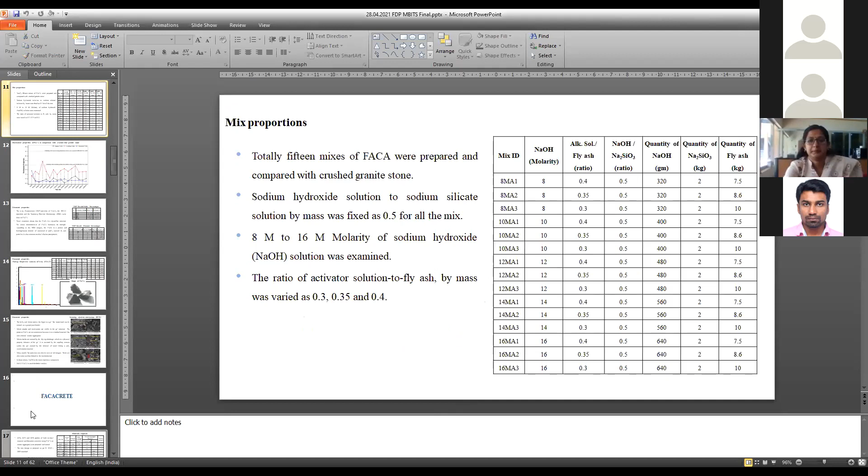But if we compare the grade of concrete M20, M25, M30, the variation and cracking, he explained sir, stress strain curve and everything. But I think on which grade, if you suitable grade in 8 molarity and sodium hydroxide, so then only I asked the doubt, sir.

No problem. With respect to increasing this molarity, obviously strength increases because of the concentration of the solutions. So what we basically did means concentrate. Okay, I basically understand sir. So now these molarities, the concentration of the solutions, add into the concrete.

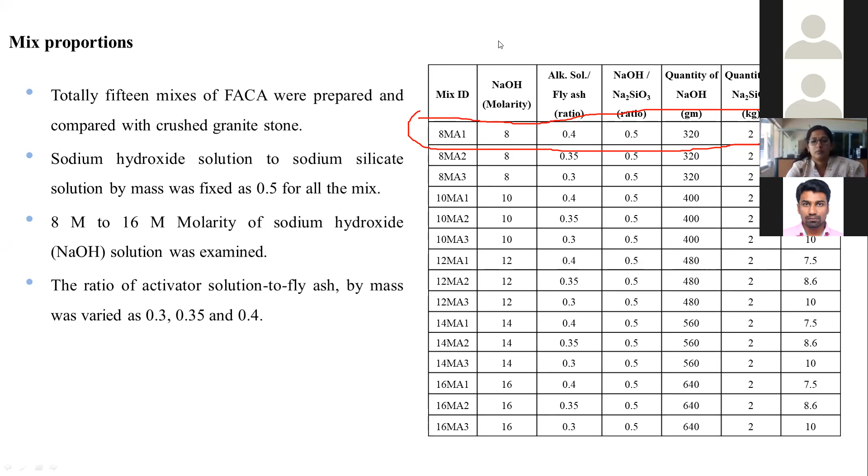In the form of coarse aggregate, what will happen? That's the thing we did here. Okay, I understand sir. Sure sir, good sir, thank you, very good question. Also you pointed it very correctly, and that is the concept.

Okay, okay, I understand sir. One thing sir, yeah tell me. See, nowadays we can use geopolymer concrete itself using your method, we have to follow that right, right sir? Yeah, geopolymer concrete, yeah, that's also molarity and sodium hydroxide, everything. Yeah, Rajkumar pointed out very exactly.

If you compare your project, sir, the Ajmal project, with ordinary concrete and FACA aggregate concrete, you can compare the studies, everything. You can also compare with geopolymer concrete, but that's another part since you're using conventional aggregate there. With geopolymer concrete we can compare. Then our concrete and normal concrete can also be compared - three parts can be compared. That is a possibility, okay sir.